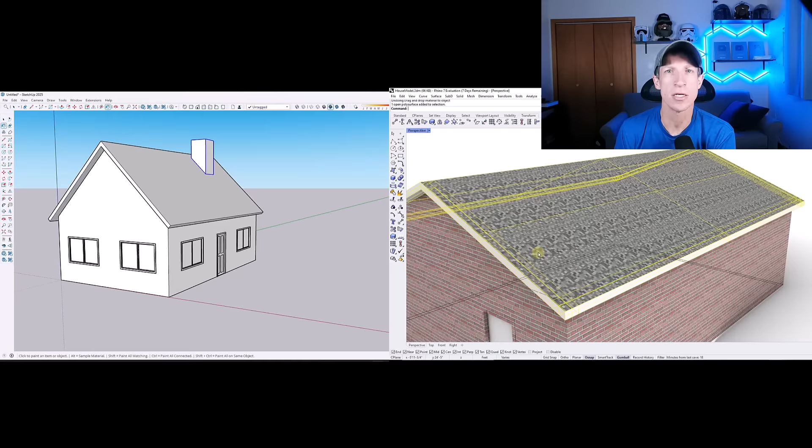There's a quiet shift happening in architecture schools right now, one that most people in the SketchUp community probably haven't noticed. In my day job, I talk to a lot of architects, people at big firms, small firms, and everything in between. And over the past few years, I've noticed something. A lot of new hires are coming in knowing Rhino and not SketchUp. They're walking into the industry already trained in a completely different toolset, and most of them never even touched the desktop version of SketchUp. That's not just a trend, it's a pipeline problem.

Because if this keeps going, in 10 years, we're not talking about fewer SketchUp users. We're talking about a whole generation of designers who don't even see SketchUp as a professional tool. Now, first off, I want to make sure I'm clear. This is not a hate video directed at SketchUp. I love this program. I love modeling in SketchUp. I love teaching SketchUp. But because of this, I'm also invested in SketchUp's success. So I'm invested in the software's development and direction.

In my opinion, there are three main things that are driving this possible shift. I want to talk about what they are. Then at the end, I want to explore possible solutions.

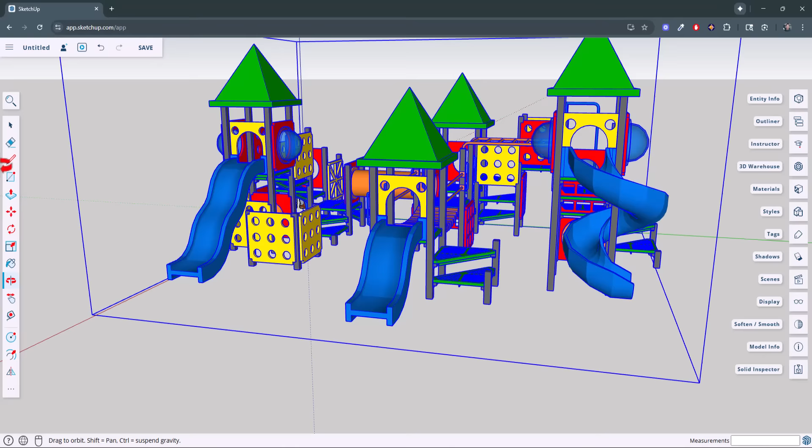So, how did we get here? Let's talk a little bit about SketchUp's education pipeline. Trimble has built what looks like a great system on paper. Students start with SketchUp for Schools in middle and high school, and then move on to SketchUp Pro or Studio in college, and eventually into the industry. But there's a problem with that, and that pipeline is a little bit broken.

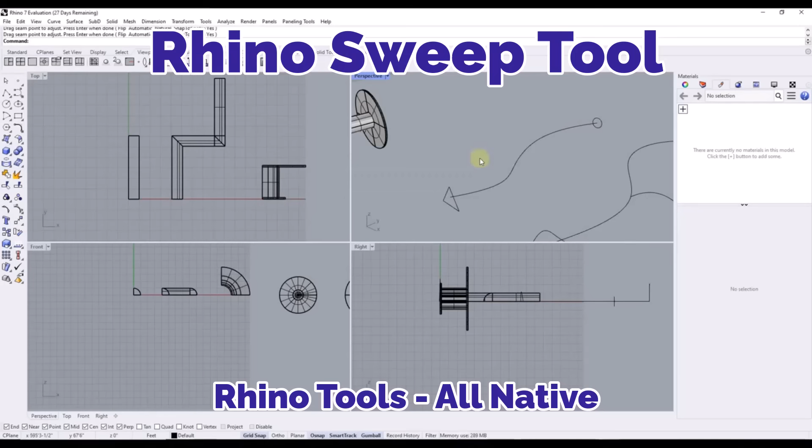SketchUp for Schools, the web version, is a lightweight, simplified version designed to run in a browser. It's great for teaching basic geometry or small classroom projects, but it's missing almost everything that makes SketchUp powerful. No extensions, the performance is slow, it doesn't have the ability to build a whole bunch of complex models. So, what happens? High school students hit the limits of the tool, and they walk away thinking SketchUp itself is a toy. By the time they get to college, they've already had the impression that SketchUp is the middle school modeling program, and professors, many of whom already prefer Rhino, don't challenge that perception.

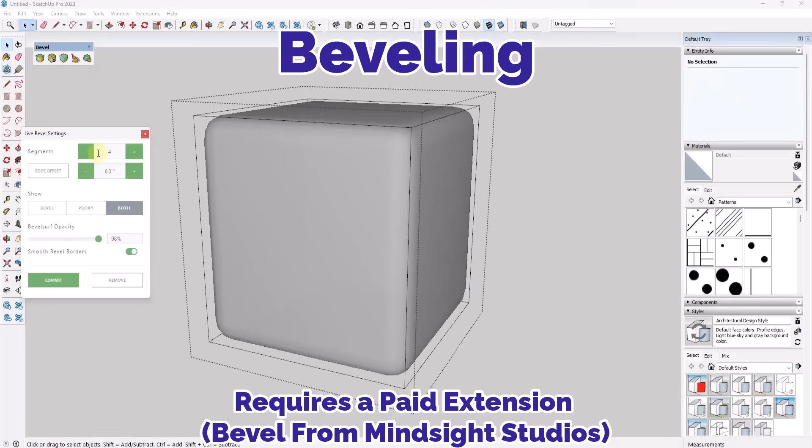A lot of the time, they teach Rhino instead because it's more advanced, it's connected to Grasshopper, and it's a tool that serious designers are using for serious projects. So instead of graduating with SketchUp as their foundation, a lot of students walk out of college as anti-SketchUp advocates. That's a branding issue that's going to echo for years. But the bigger problem is that some of those students aren't wrong.

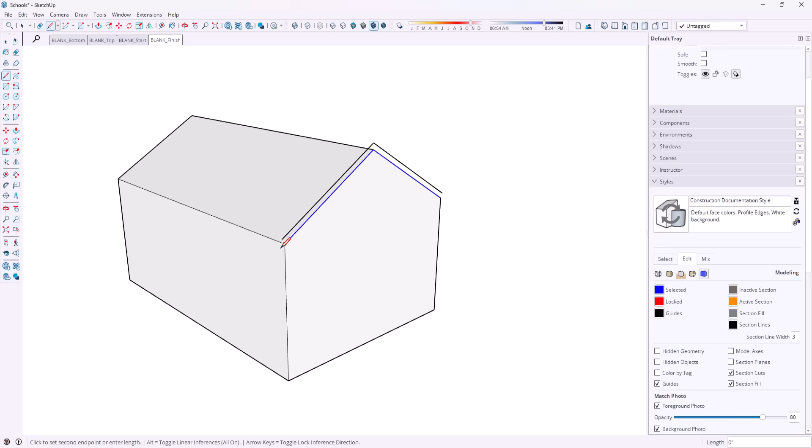Because when they open SketchUp for the first time and try to model some of the more complex forms that they want to, it just doesn't have the same capabilities. There are typical 3D modeling tools that are missing, like beveling or chamfering edges. There's no way to extrude curved surfaces natively. There's no simple surface from edges function. You can't create complex curves. All of those things require paid extensions, or extensions that are built by developers that may or may not update them for new versions of SketchUp.

I know SketchUp has always tried to be a lightweight, easy-to-use modeler, and I get it, and that's one of the reasons that I love it. It's one of the most accessible 3D modeling programs in the world. But the problem is you're not giving anything for people that move beyond beginners, and they have to rely on an extension ecosystem where they have to buy extensions in order to add typical 3D modeling tools. And that's a problem. And my bigger concern is that somewhere along the way, SketchUp seems to have learned the wrong lesson from its own success.

The magic of SketchUp was never that it was limited in order to make it accessible. It was that it made complex things simple to do. SketchUp didn't make 3D modeling easy by stripping out features. It's that it made the whole 3D modeling process easy to approach and learn for new users. That's not by artificially limiting tools, but instead by looking at the way that 3D models are created and finding an easier way to work with them. The reality is, in the past 3 years, there hasn't been a single new modeling tool added to SketchUp's modeling toolset.

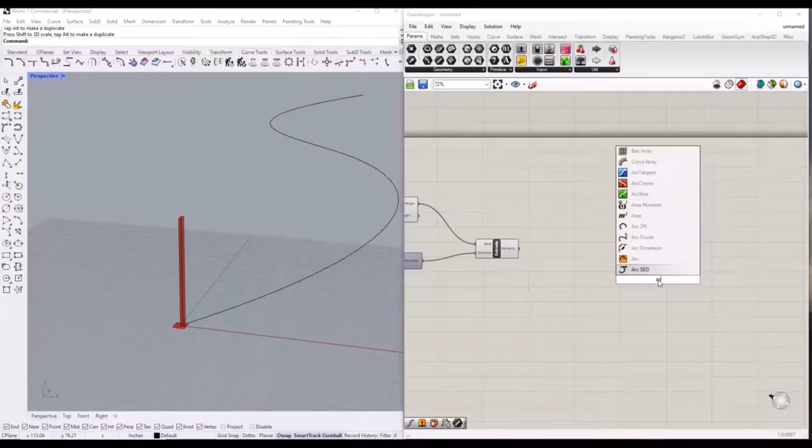Instead of removing or avoiding advanced modeling tools, SketchUp should be asking, how can we make these powerful features intuitive enough that anyone can use them? They need to make them accessible and easy to use, not just stay away from them and not add them to the program. That's how you stay the tool that welcomes new users, but also keeps advanced users using the program their entire career.

So finally, the other reason that Rhino is really popular is because of Grasshopper. Grasshopper is Rhino's node-based parametric modeling tool, and it's a big reason why a lot of students and architects love Rhino. It's clunky, it's confusing at first, but it is powerful. It lets you build models that react to sliders, formulas, and inputs so that you can test and iterate on ideas fast. It's not perfect, but it gives students something that SketchUp doesn't have, the ability to explore design logic directly in their models.

Now, SketchUp has something kind of similar. Trimble Creator is the creation tool that's used to create live components for SketchUp, but it's browser-based for the creator itself. You have to open up a web window inside of SketchUp and have an internet connection for it to work, and it doesn't interact with your current SketchUp models inside of the actual SketchUp workspace, meaning you can't have it draw things along curves or anything like that, making it significantly more underpowered than Rhino's Grasshopper.

So, how does Trimble fix this? To me, the solution has 3 parts. Number 1, you've got to fix the education pipeline. Students in high school shouldn't be learning the web-based version of SketchUp. They should be learning the pro version of SketchUp. There should be more resources to help students understand both the power of SketchUp, but also to get them started so that they're comfortable walking into that college experience knowing how to use the program.